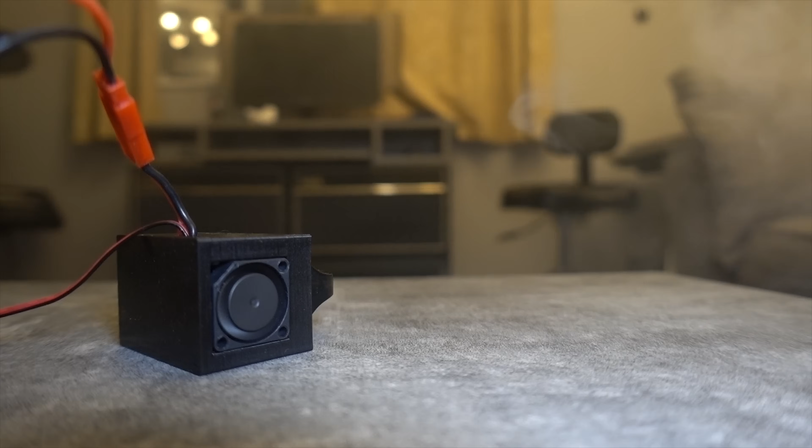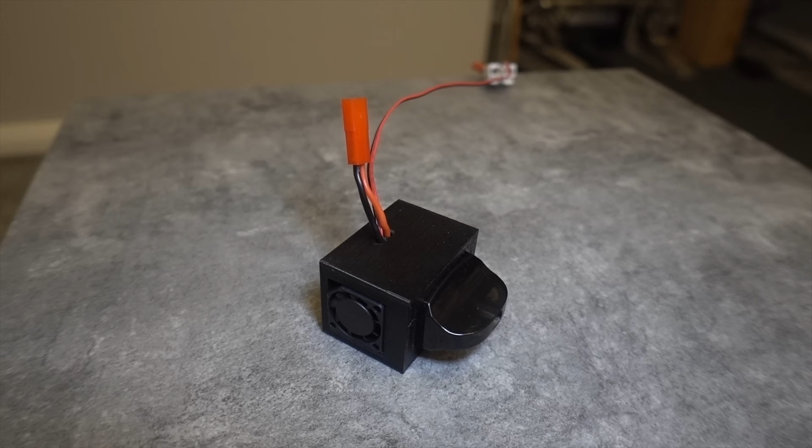I'm AndyRC and today I'm going to be talking about a project that I've been working on for about a year and a half, maybe longer. Now, I've always been an advocate of making the RC hobby more exciting, and one of the things that does that is adding smoke to a model, which is easy to do with an RC jet because they get so hot anyway. All you have to do is pipe in diesel or whatever kind of oil and you get a bunch of smoke out of the back. And actually the same for petrol powered models as well, because the exhaust gets so hot. Again, just pump oil into the exhaust and it spits out a load of smoke.

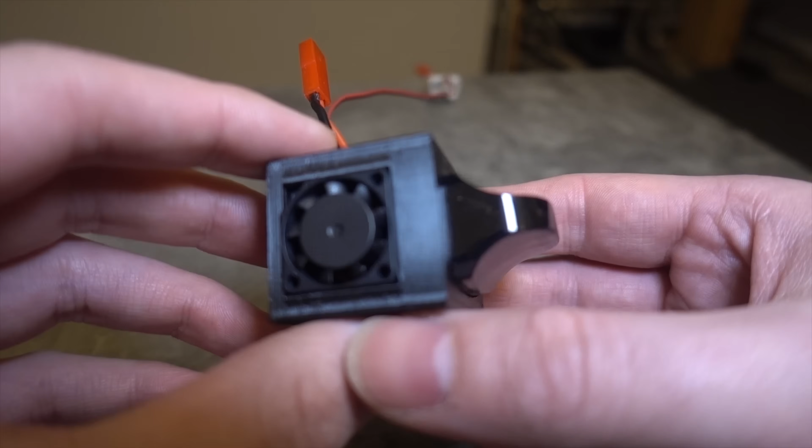But with electric models such as drones, RC cars, even electric boats, it's much more difficult to get a smoke generator made for it because we don't really have anything hot running. In fact, we don't want anything hot running. So this is a project that I have been working on, as I say, and it's still a work in progress. But essentially what we have got here is a 3D printed box which I designed.

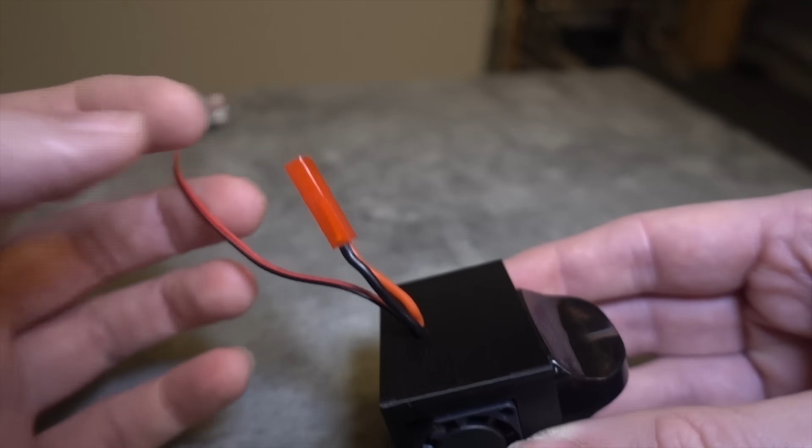Then in here we have got a vaporizer. This is the Nord 4. It's actually called an atomizer, this part. And then a 20mm 5-volt fan. And the idea is that we plug an ESC into here. That will then vary the voltage and current. And this fan here, which actually you can see I've got running separately at the moment, will then blow the air through this device and we'll get some sort of smoke.

I've learnt a lot along the way, and you can't use this kind of thing for a plane. But don't worry about that, because I'm working with an RC company to produce a smoke system for model planes and quadcopters that will produce a colossal amount of smoke.

But the reason why these vaporizers seem to produce an enormous amount of smoke is actually down to a few factors. The first one is the fact that they are sucking the smoke into their lungs, and much like a bagpipe, the lungs are acting as a storage place. So, you know, you'll be walking along and see this guy or gal and there'll be a plume of smoke, and you'll think, wow, why can't we have that on an RC model? And the answer isn't just that, but of course we don't have anywhere to store the smoke, and essentially we're doing the opposite of what people who use vaporizers do. We are actually blowing out of this and not sucking.

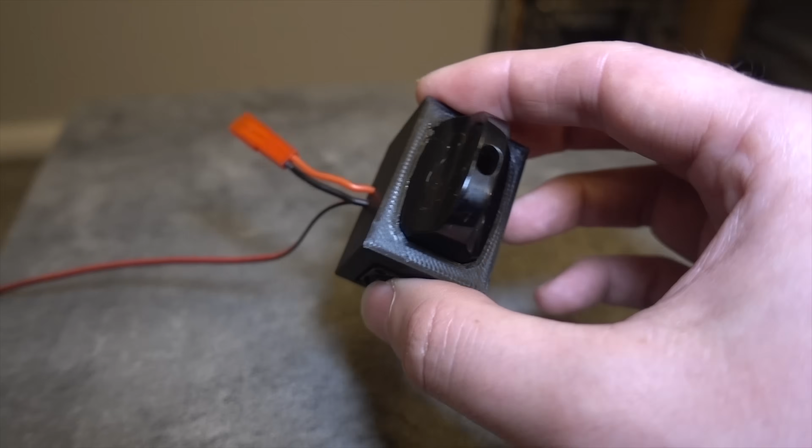In fact, I believe that even just having that limited burst, you are still replacing the coils in these things maybe every 3 weeks or so. I don't know, I'm not an expert on that particular subject. So is there something that we can do to stop this coil from overheating and breaking really easily? Well, actually, yes, there is. You see, in the RC world, we have ESCs. So they basically control the voltage via PWM.

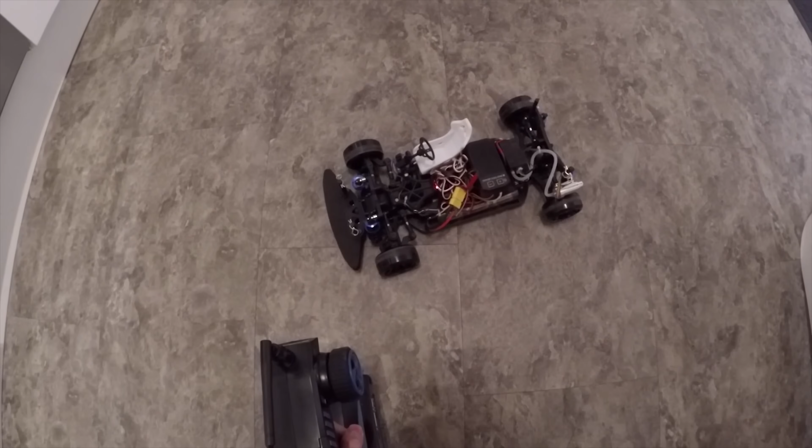So my original idea for this guy was I had an exhaust on my RC car that I bought, and it was supposed to puff out a little bit of smoke, and it was absolutely terrible. And I thought, wow, there's got to be a better way than this. And you know, just like everybody else, when you see these big clouds of smoke everywhere with people using these devices, I was like, well, there must be something that we can do. And there is. And so I think there's going to be plenty of applications for this sort of thing, like, say, smoke on an RC boat, or even smoke on an RC drift car.

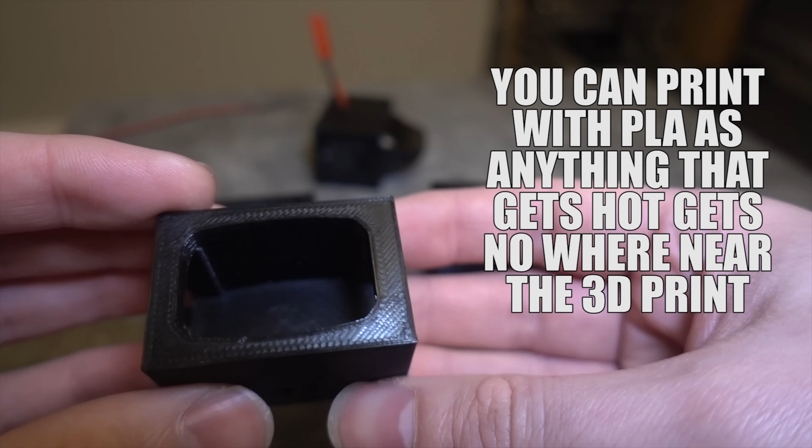Over the years, I've been through various different designs and also, you know, dual fans, which you would think would help, but it actually doesn't.

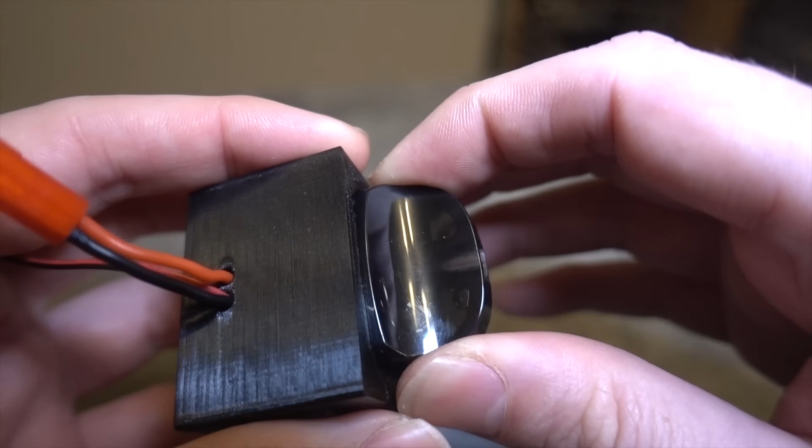I've tried different size fans, and this seems to be a pretty good setup. Now, I can probably put a link in the description to the fan, but if you are looking for the atomizer, then just look for the Nord 4.

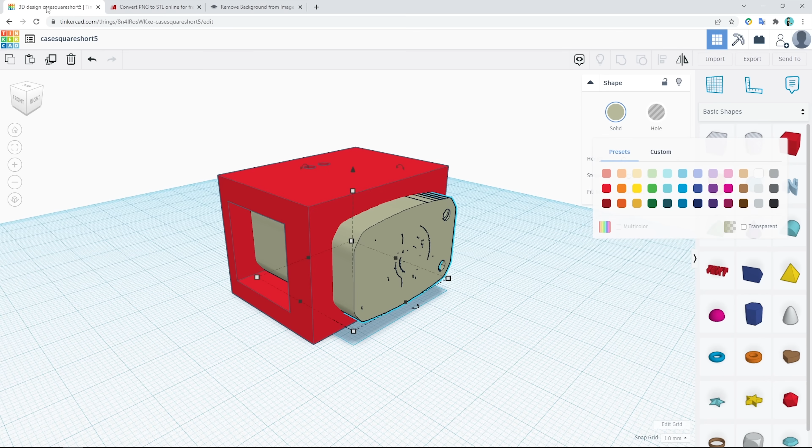So this is what it looks like inside. It's very simple. You're probably wondering, how did I make this fit perfect? I actually took a picture of it from below, and then you can convert that picture into a PNG, which is like a transparent file, and then you can convert that into a 3D printable file, and I just turned that into a hole, into a box, and it just worked miraculously.

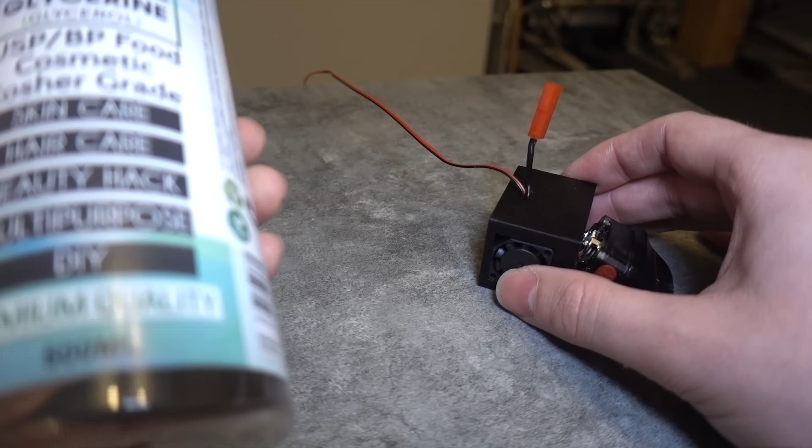Yep, so this is how things are soldered up. These are two separate things, and one of the reasons I wanted to try this, I do have a better solution than this, by the way, is that it is really clean. You see, the fluid that we are using to get the smoke is something called vegetable glycerine. I think that's how you say it. It's used everywhere, skincare, you know, multi-purpose, DIY, whatever. But it produces the most amount of smoke, and it hardly has any odor.

So the coil in this one, it is a 0.4, so sub-ohm essentially. The center pin is the voltage, and then the outer ones are the ground. I believe this pod here is designed to snap to a magnetic system, so you can switch these out. I tried to do that. It didn't work, and I didn't want to risk shorting these out here. Obviously, the designer of this system is much better at making these devices than myself.

And then as for the fan, we've just got two holes on the top here, and that's it. This is where you fill up the fluid. I just use like a syringe, and that gets that in there.

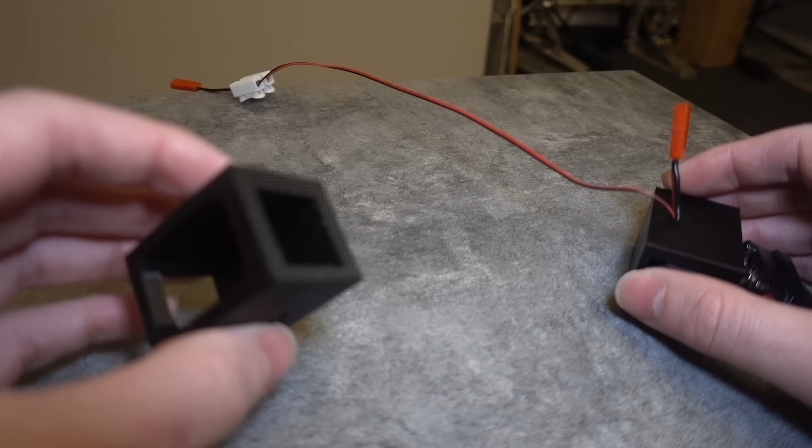Now you might be thinking, why not two fans? Why don't two fans produce more smoke? And I think it's all to do with pressure. I had a fan blowing from this side and one from that side. In fact, I've got the chassis here. It hardly produced any smoke at all. I guess either the fans were cancelling each other out, or, you know, as soon as I covered that hole up, you got double the amount of smoke out of the thing. So that's when I went for the one fan setup.

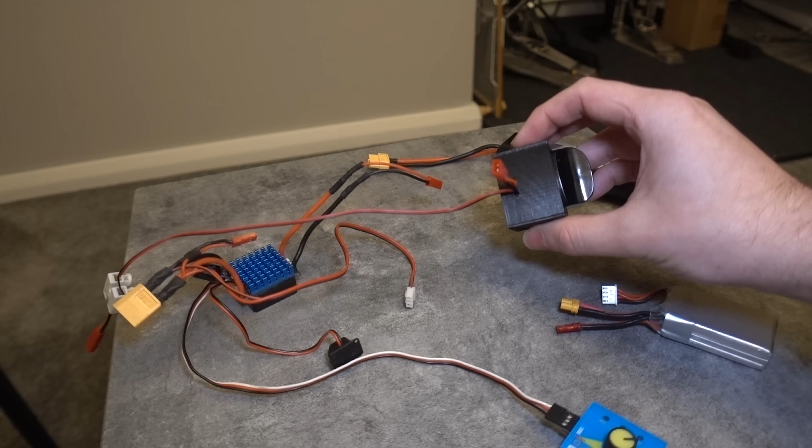Okay, let's take a look at a use case scenario for this guy. By the way, I will provide the STL files if you're interested in having a go at something like this yourself. I believe it to be fairly safe because the mesh coils in there, when they get too hot, they just break and it'll just stop working. That's just been my experience.

My original idea was to have this in my drift car as a potential exhaust, but looking at how much smoke it could produce, you could definitely use it as, I don't know, maybe a tire smoke simulation for drifting or something like that. This is the brushed ESC out of my drift car, and what we have here is just a couple of connectors.

Now, you might be wondering, why has the fan got a separate connector? And I found this out just by trial and error basically, but these fans have a sort of ramp up time. So you would think that, you know, you could connect the fan and also the ESC together, and then when you press the throttle, let's say, the fan starts up and also the smoke will come out.

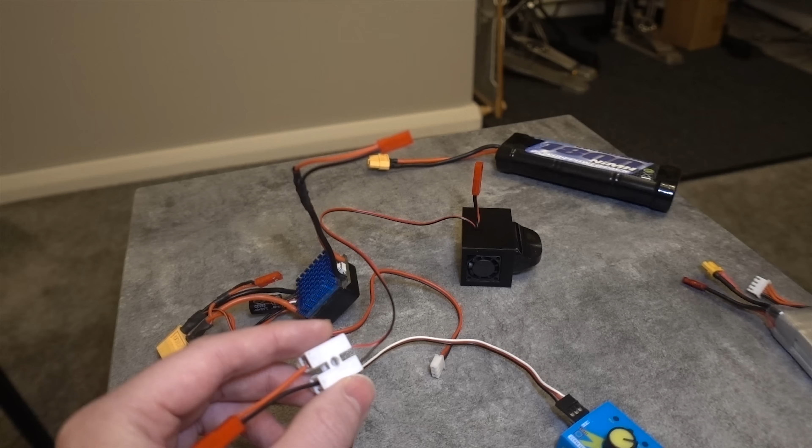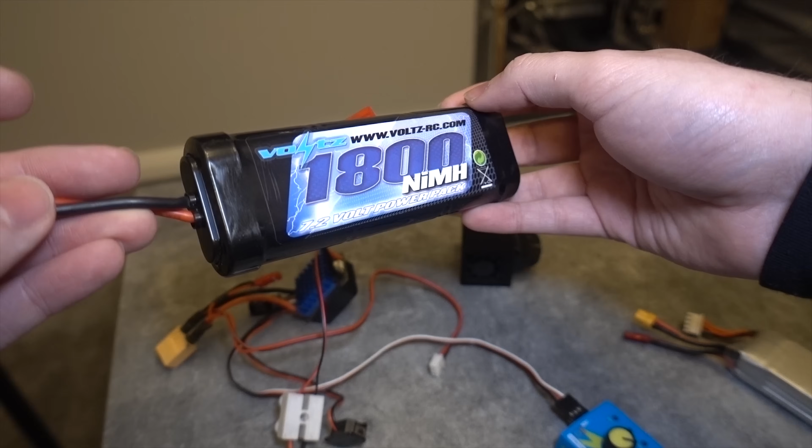rated for 5 volts. But I guess just like with quadcopters and motors, theoretically, you can run a 4S motor on 6S, and what we are getting here is just basically more RPM out of the fan. This is your typical nickel metal hydride battery that are used for many RC cars. Obviously lipos are used. These tend to draw less current, and of course there's no balancing either.

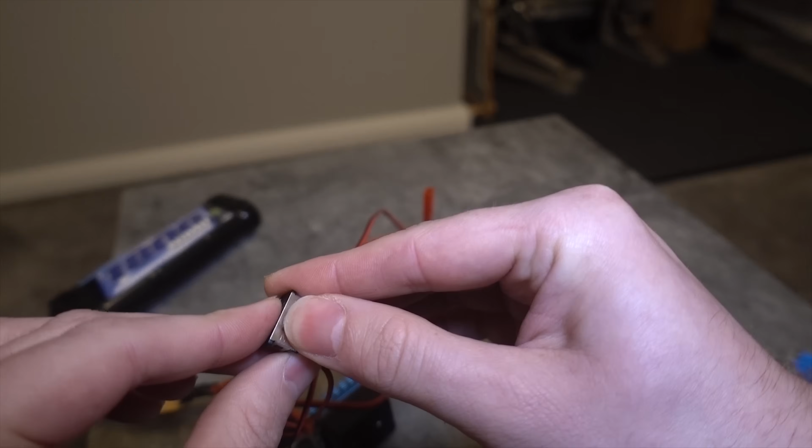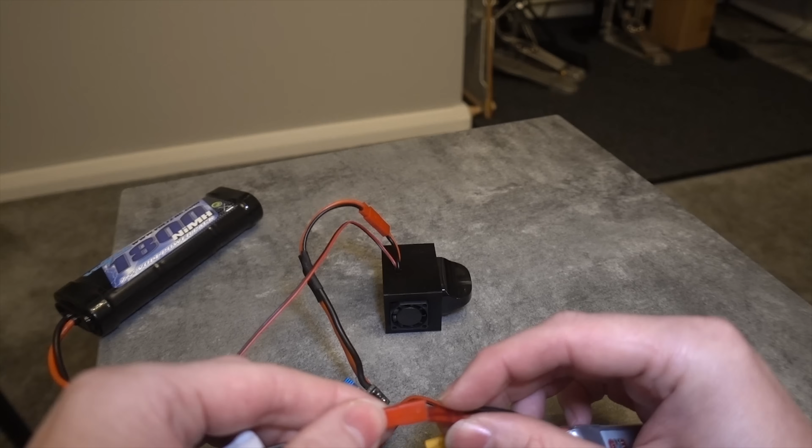Okay, so first of all, let's make sure that the ESC is in the off position. Got the battery connected to the ESC here, and we absolutely want to make sure that it's in the right polarity. And now what I'm going to do is connect the fan. You probably won't hear it ramp up because it's going to vibrate on this table, but believe me, it does take a while to ramp up, so really you want this fan running all of the time. So I'm just going to plug this in and then try get everything out of the way as much as possible, so we can check out the smoke that it produces.

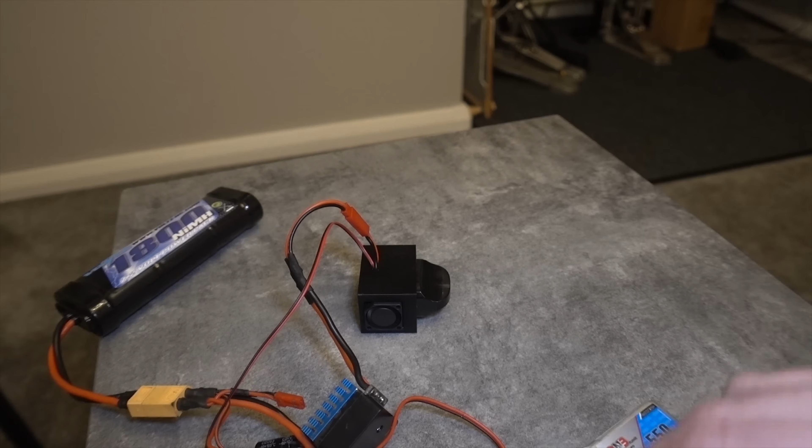So you can hear the fan going there. And then if I turn the ESC on with the switch, I'm going to have to be very quick to find center point, otherwise you're going to get a load of smoke everywhere. So let's turn the ESC on. There you go, you can see straight away. Let's try and get some good shots of the smoke. Are you ready? Check it out.

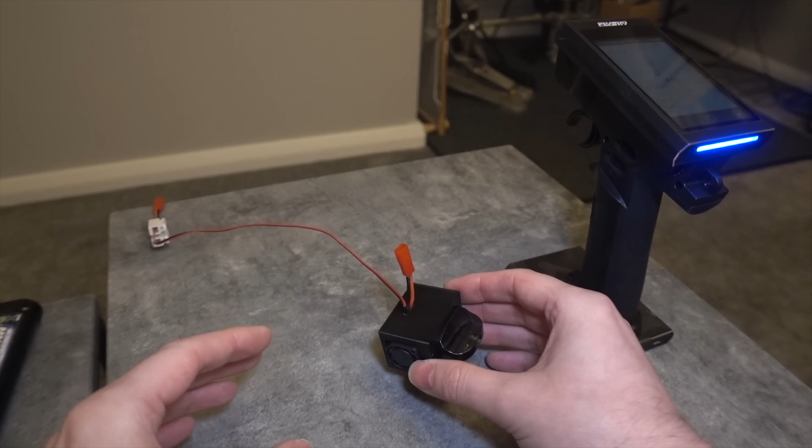Oh my god, it is filling the room full of smoke. Let me move the camera. It does produce a lot of smoke. Look at that, man. It is filling the place. So yeah, not good enough for an RC plane, I would say, but definitely good enough for an RC drift car. And I'm gonna have to open a window because that's producing a lot of smoke. Sorry about that, had to take a short break because this guy did actually set the fire alarm off. So yeah, make sure that you are in a well ventilated area or even outside when using something like this.

Now you might be saying, Andy, how can I use this in a practical way on my model? Well, you could use components that sort of limit the current and limit the voltage, but the problem is they are usually quite big devices and they're not rated for high amps. So my solution is, well, it's quite an expensive one. However, if you are down the rabbit hole with RC cars, RC boats, then you're going to want to invest in a decent controller, just like we do in the quadcopter world. One that is programmable and you can do various things.

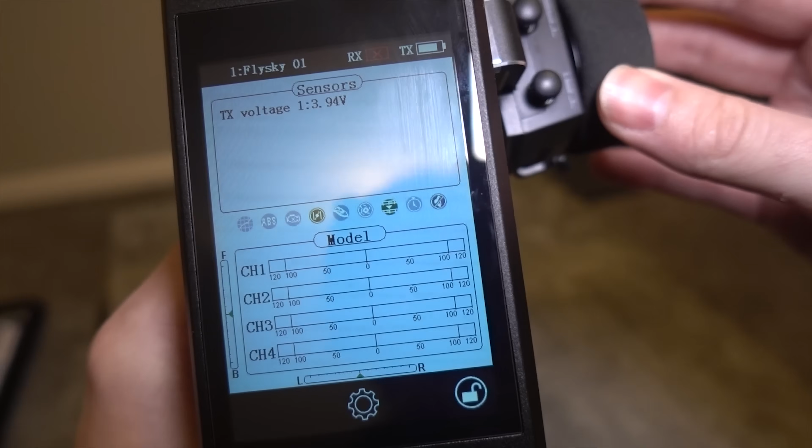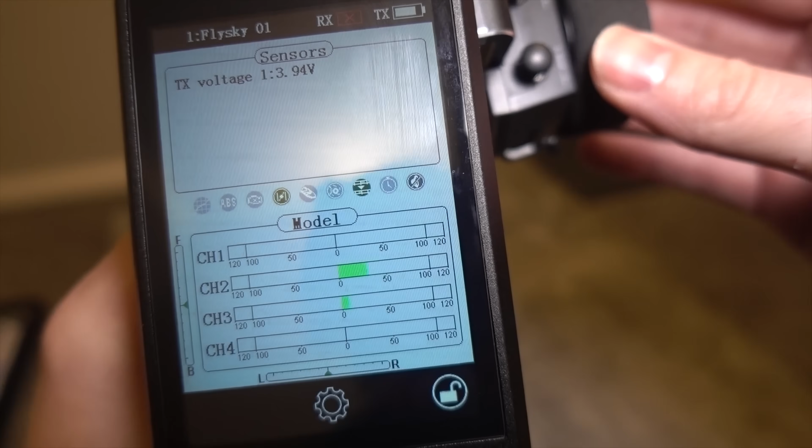So this is the Flysky Noble NB4, and it's got the steering on channel 1, which is fine, but if you check out channel 2, that's reverse channel 2, but channel 3, you can see it matches the throttle, but I've dialed it down to the same value that I was turning my little servo tester, which you can do, and it will run all day like that. Great for a drift car.

The problem I've got at the moment is the weather is terrible. I usually drive my drift car in the indoor sports hall. Something like this is definitely going to set the fire alarm off, which, with it being a school, would trigger straight away the fire service, and it'll be a big waste of time for them. But yeah, there you go. This has been a fun project, man. This is what I absolutely live for. There's going to be more stuff like this coming, and we're going to be able to get more smoke and more spectacular things for the RC hobby so that we can get more people into it, because why not? It is absolutely superb.